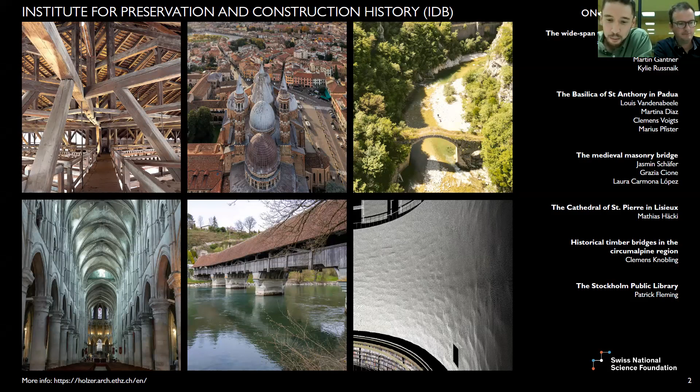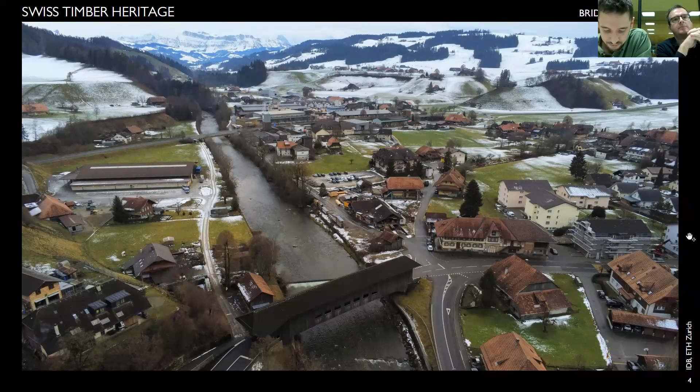We will focus on the incredible Swiss timber heritage, which was not damaged by the wars of the 20th century, making Switzerland a unique location to look at old bridges and roofs. In particular, we would like to draw your attention to this technological feat, which consists of making curved elements out of straight timbers. We find such laminated arches all over Switzerland in bridges and roofs.

So Clemens will now start with the bridges, and I will continue with the roofs. Thank you, Louis.

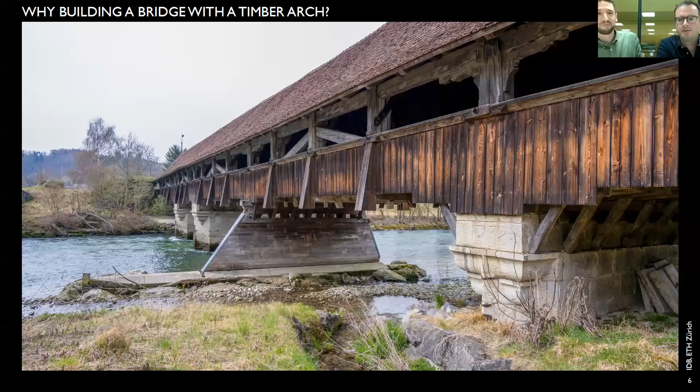So you expect me to say something about timber arch bridges, and I'm showing you this bridge here with a simple trestle in the middle. Don't worry, I will not start from zero, but this picture helps me to speak about the actual construction task: why would you build a bridge with a wooden arch? Doesn't that sound a bit absurd to make an arch out of wood, a material that is essentially linear, especially before Otto Hetzer invented the laminated beam?

We will hear more of that later. One reason is the danger of floods and ice. You can imagine this here: the more the piers are in contact with the water, the more the bridge needs to be maintained, and the greater the risk of collapse due to floating debris and ice, for example. The piers of the bridge shown here have had to be rebuilt several times since the 16th century. An arch would be a structure to span the whole river without any intermediate support.

Another reason might be the complexity of timber joints. The greater the span, the more complex the structure, and the more timber joints need to be designed and incorporated into the structure.

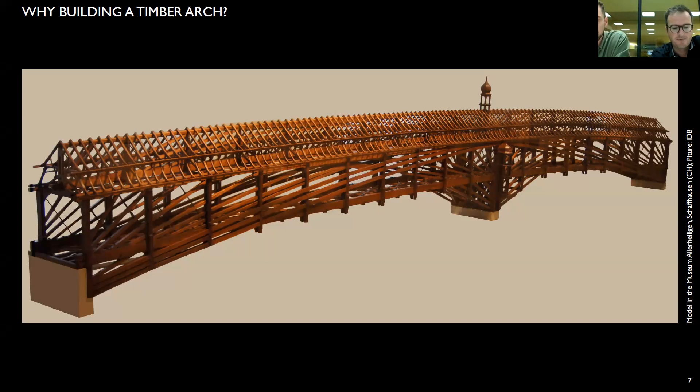Less than 10 years later, the same master builder built a bridge in the nearby town of Wettingen that had the same free span as one of the openings in Schaffhausen, around 60 meters. But it was constructed in a fundamentally different way. Instead of a complex multi-layered structure, the main element is now a solid, true arch to which the king posts supporting the roadway are attached.

Here is our rigid arch, the king posts, which are carrying the roadway of the bridge. And please also keep in mind that the arch of these kinds of bridges is always on top of the roadway, sometimes leading directly to the abutments, and sometimes working as a kind of bowstring structure when the arch is fixed to the tie beam.

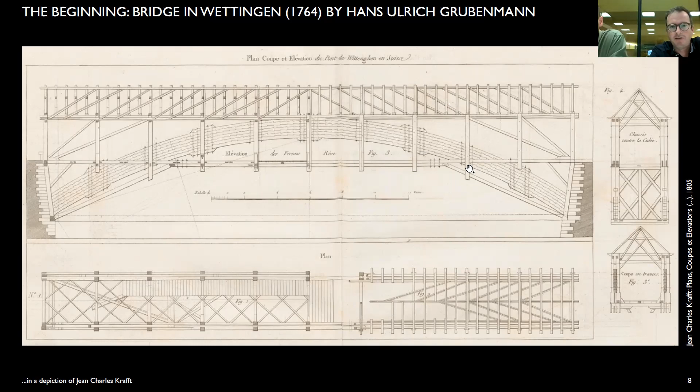Keep that in mind. In this drawing by John Soane, he shows these bolts fixed in a radial way, which is maybe more likely. But on the other hand, he, or the engraver, did not care so much about the interlocking of these arches — you see here these toothed structures.

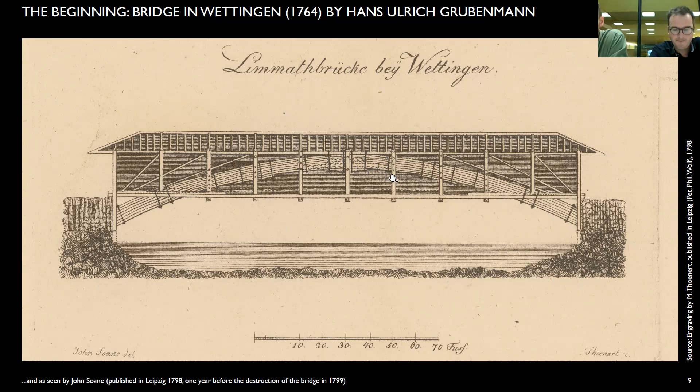There is a third source for this bridge, a model designed by the builder Grubenmann himself. It shows another picture. If you look at the elaborate wind bracing and the complex roof, you might assume this is also not representing the real bridge. Indeed, it was a model built to present the idea of an arch bridge to the abbot of the Wettingen monastery, who was the one who paid for it in the end.

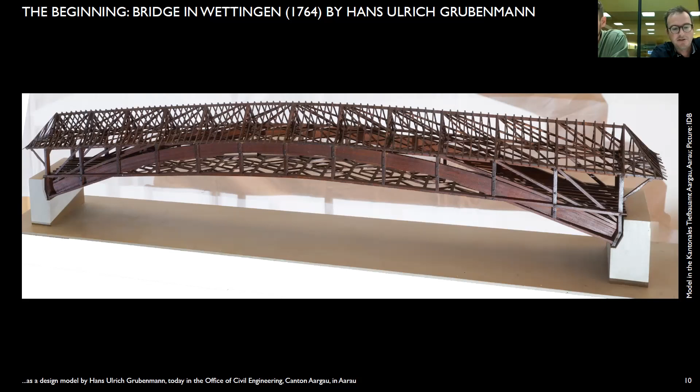But what is for sure is that the development begins here and already reaches a significant peak. And if I say it was beginning here in Switzerland, that's not completely true — the idea of building arch structures in wood is quite old.

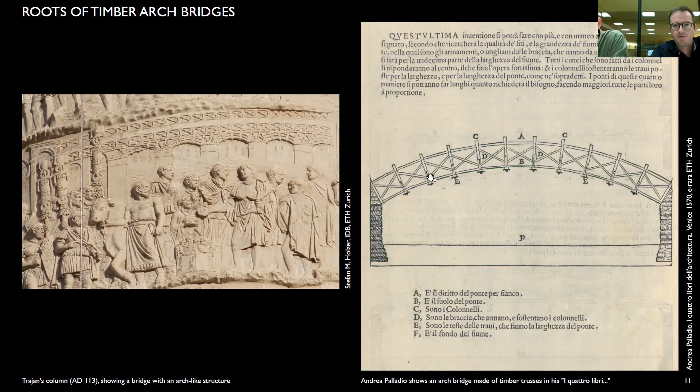In the 16th century, here on the right side, you see a depiction by Palladio. He shows another popular idea, a trussed arch, imitating the principle of a stone bridge by assembling trusses like wedge-shaped stones.

Also, the idea of the massive arch, which is the subject of the following slides, is older but never really matured at the time. This drawing by Fausto Veranzio from 1595 must therefore be regarded as a curiosity.

But what he does take into account is that the two layers of the arch should be joined together in a shear-resistant manner, even if this type of production, like a jigsaw puzzle piece, would entail a high consumption of wood.

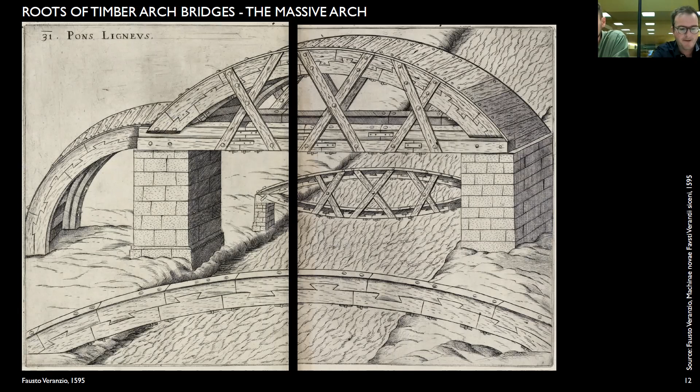We also don't want to ignore that the idea of the wooden arch had its first breakthrough in the 16th century, for example with Philibert de l'Orme. Here you see his invention on the left side, in the depiction from himself, or here from Krafft, 1805.

But as I said, we are confining ourselves to the massive arch made of bent beams, not of sawn boards.

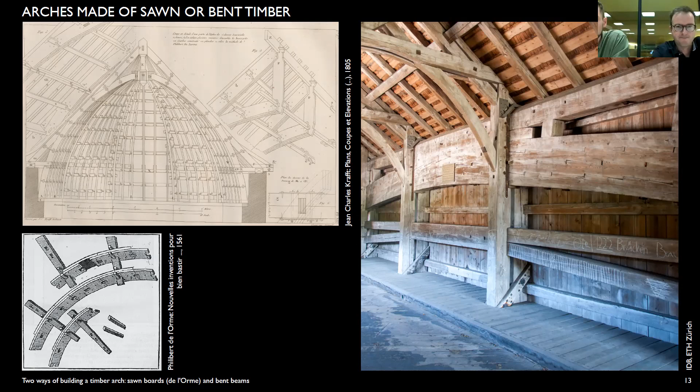This map shows the locations of the remaining historic timber bridges with real wooden arches. You can see they were all built in the 19th century. There used to be twice as many, but most of the 18th century bridges have not survived — some were torn down, others were sacrificed to car traffic. Nevertheless, there are still 8 of them in place, with a remarkable cluster in the Emmental Valley, in the center of Switzerland.

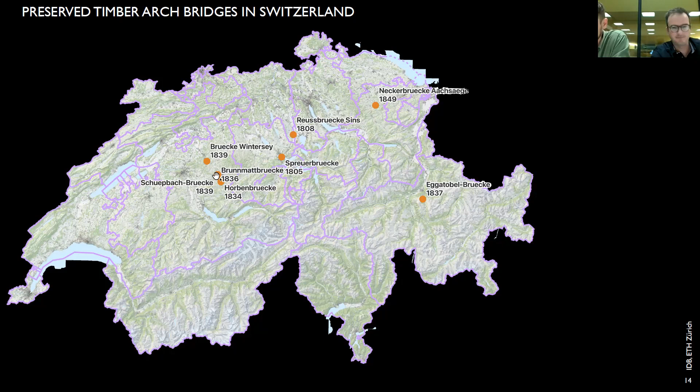The surviving bridges show two different types of timber arches: those with interlocking layers, as you see here on the left side, and those with non-interlocking layers, as you see here on the right side. The lamella of the interlocking arches show a saw-like structure, each interlocking on both the top and the bottom with the next lamella.

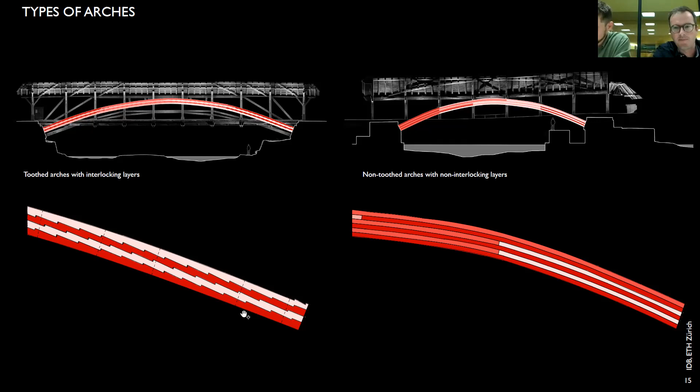In the case of interlocking arches, the oldest is the well-known bridge of Wettingen, already introduced. The oldest one with a non-interlocking arch was the bridge of Mellingen, also already destroyed. Mellingen was built 30 years later than Wettingen, in 1794, by the master builder Ritter from Luzern. We could call him the doyen of the non-interlocking arches. We didn't find an older example than this one by Joseph Ritter.

Interesting is that the seemingly complex interlocking arch is older than the non-interlocking arch. In fact, it turns out that the latter may have been a simplification, but it does not have the durability and monolithic effect of the interlocking arch. We will see this with another example on the next slides.

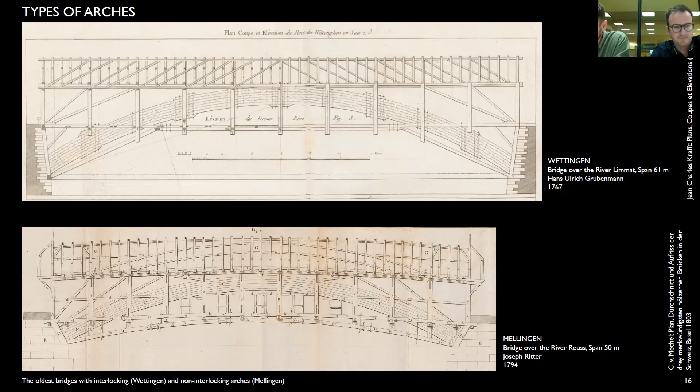But first, we want to lift ourselves up to take a broader view of the global context. We see that the oldest bridges we can still trace are in Switzerland - here, Wettingen, already shown, and also Mellingen, still from the 18th century. The reasons for this were explained by Louis at the beginning. By the way, the red ones here are the ones still existing.

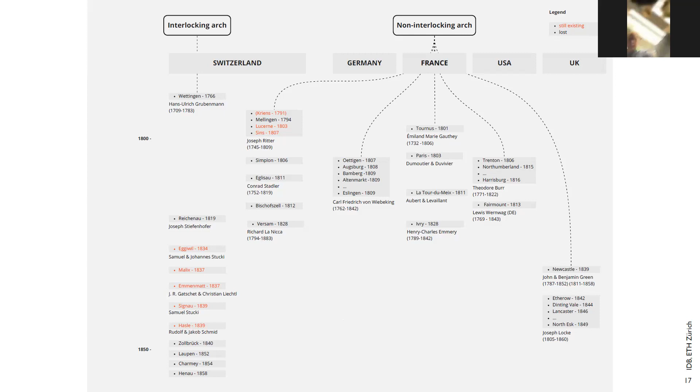You can see that it also starts in France, in Germany, and also in the US at the beginning of the 19th century. A famous builder in this context, for example, is Carl Friedrich Wiebeking from Bavaria. Obviously, they all built the arches below the roadway of the bridges, whereas in the Swiss examples, with one exception, the arches are always above the roadway, supporting it with the help of king posts.

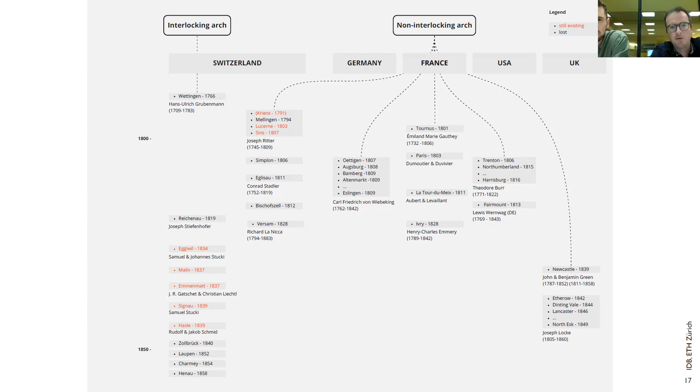Let's have a look at some contemporary examples from outside Switzerland. Here you can see the famous Pont de la Cité in Paris from 1803. This was later destroyed and rebuilt in more or less the same way. What you can see here is a non-interlocking arch composed of 4 layers of bent beams below the roadway. As you can imagine, this is a disadvantage for the durability of this bridge, because the arch is not really protected from the rain. Yes, there is cladding on the sides, but the water can still drop from above onto the arch and keep it wet, so to say.

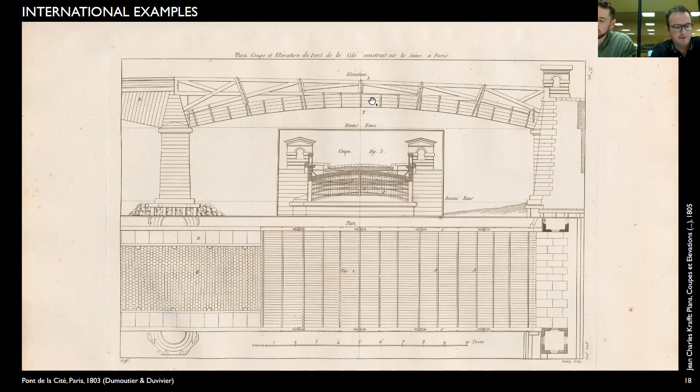Another famous example, in this case from the US, is the Colossus Bridge near Philadelphia, which had a span of an incredible 340 feet. Also here, the Colossus Bridge shows the arch open - it is not really protected. It is below the roadway, which makes it difficult to maintain this kind of bridge.

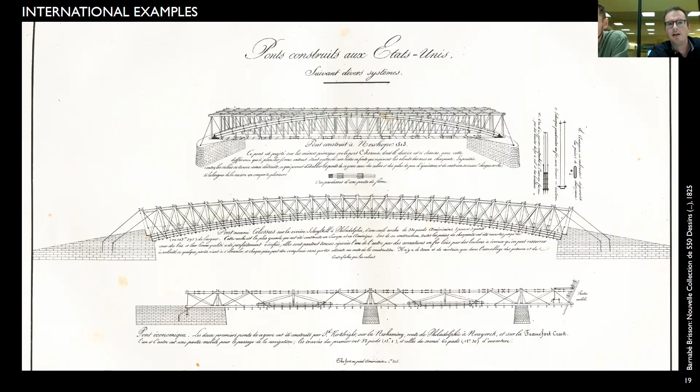But we want to limit ourselves to the Swiss examples today. So let's get back and have a look at this overview. You see here the preserved arches of the Swiss timber arch bridges in these drawings, all shown in the same scale. You can see the difference from these very tiny bridges, like the one here in Grisons, Graubünden, the very east of Switzerland, to the biggest one in the Emmental region with a span of 60 meters - so from 20 to 60 meters.

2 bridges have a non-interlocking arch; the rest have interlocking arches. Next to these arches you see, if you can see it, the members of each arch - we have shown them here separately. You can see a big variety in size and also in the degree of curvature these members have. The process of bending will be explained in some slides later. Another aspect which might be interesting: we have just one bowstring arch which is attached to the tie beam, not shown here. All the others go directly from one side to the other, directly to the abutment.

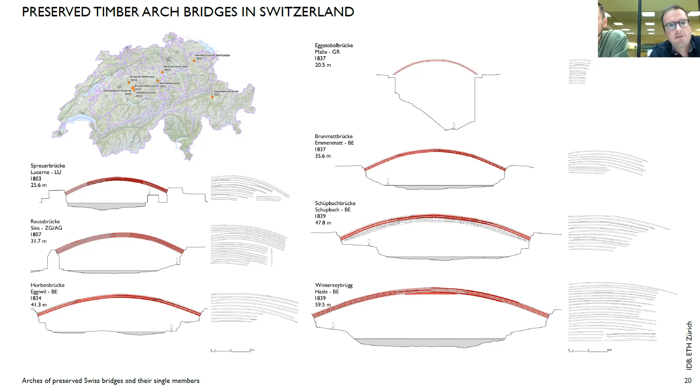I will now show these bridges in a few pictures. First, the non-interlocking arches. A famous example, again built by Joseph Ritter, the master of the non-interlocking arches, is the Spreuerbrücke in Luzern, a touristic hotspot. It has a span of 25.6 meters and is composed of this non-interlocking arch, made up of these members which are shown in different red colors here.

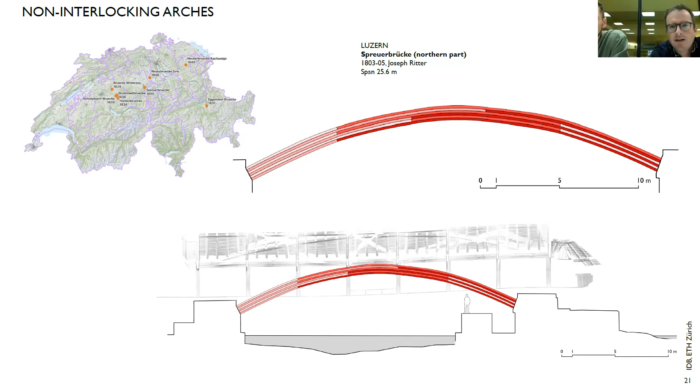This is no problem here in this case. It's just a small bridge with a span of 25 meters, and there is no heavy traffic on this bridge, just open for walking. So this might not have become a big problem here.

It's a bit different in the next example, also a non-interlocking arch by Joseph Ritter with a bigger span of 31.7 meters, also above the river Reuss in the town called Sins. You can see it here. Just one part of the bridge has a real arch.

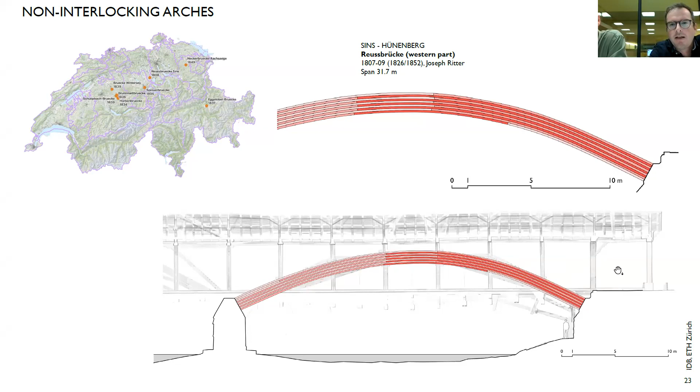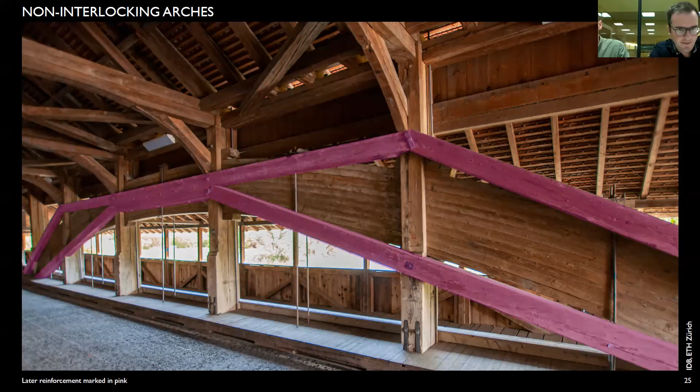And if you see the structure here, it's a multi-layer arch, non-interlocking, but you can see it is reinforced by an additional truss, because also this arch was not really working anymore, especially because of the heavy traffic on this bridge. Also before the cars came, this bridge was used for heavy loads, and this not very rigid, not very stiff arch was not enough here.

Now, as I said, we just have two bridges with non-interlocking arches. I come now to the interlocking arches.

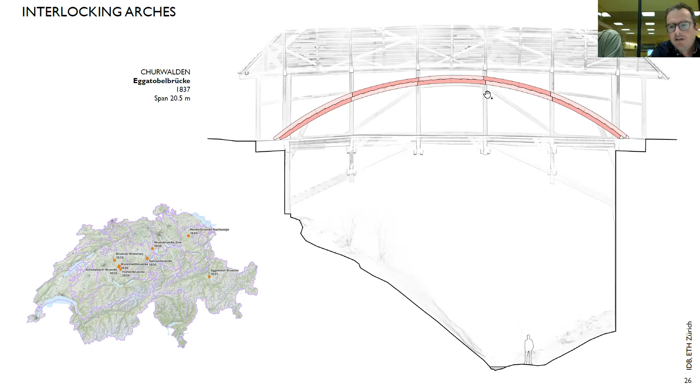Our single bowstring construction here in Graubünden, with a span of just 20 meters. You see here very short members of this arch. It's also just two layers, and all these members have a butt joint directly in the middle of the king post, but it is still a continuous arch. You also have arched beams which end left and right of the king post. Then we wouldn't call this a true arch bridge, but here it is really a continuous interlocking arch.

A very tiny bridge, but very beautiful with this nice landscape around it. But then they become really big.

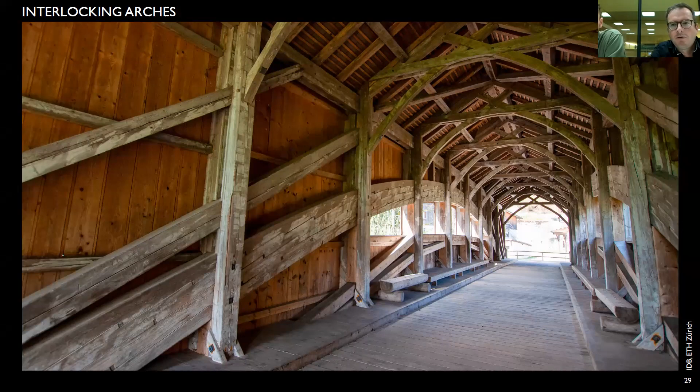Next example is the Brunnwartbrücke, heavily restored and also translocated, built in 1837 and translocated in '91, with a span of 35.6 meters. You see here the 4-layer interlocking arch, and more or less the same structure you can see in

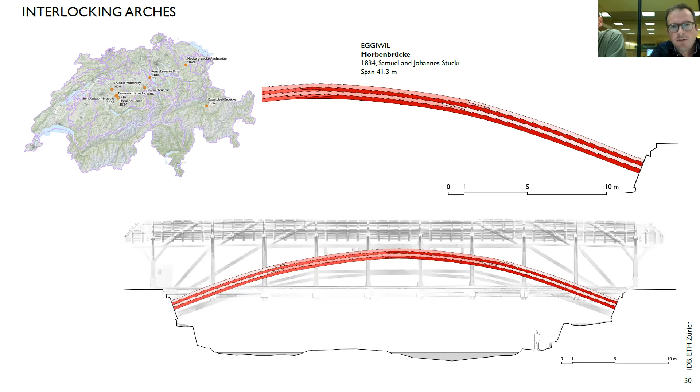a longer break in building arch bridges. We are now in the year 1834, and the bridges I showed before were around 1800. Maybe there were some more arch bridges in the meantime in this region, but there was a big flood in the 1830s.

I don't know exactly when, but this big flood swept away all the existing bridges at this Emme River, and only this one here survived. This was already standing when this big flood came, and maybe this was then the role model for other arch bridges in this Emmental region.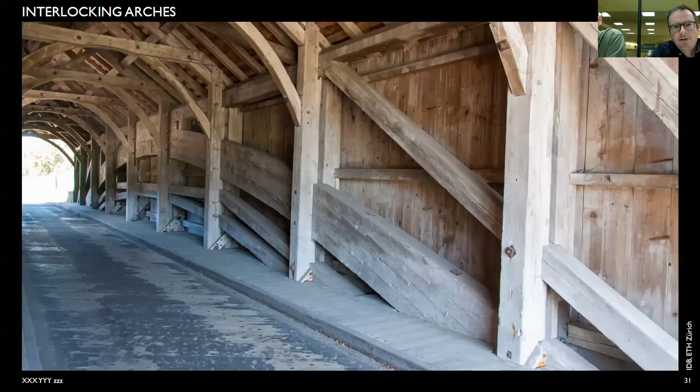Like, for example, here you can see it in a photo, the 4-layer arch. This is really one of the most beautiful examples of an arch bridge. And this here was then also built, maybe the bridge shown before was the role model for these following bridges

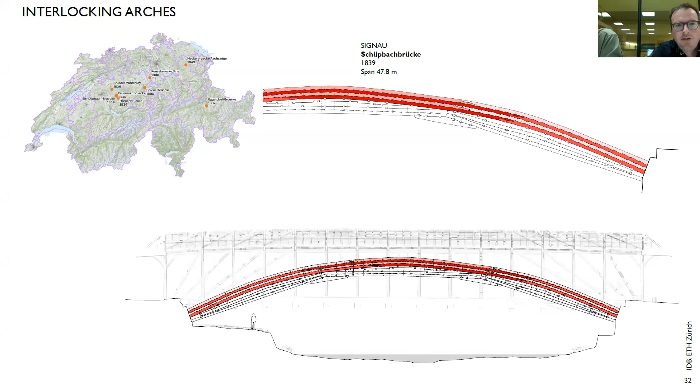then in the Emmental region, which survived this big flood because of this one rigid structure, which is not touching the river. And this is the Schüpbachbrücke in Signau from 1839 with a span of nearly 50 meters, which is still carrying lorries with a weight of up to 28 tons.

Yeah, but you see here this arch was heavily reinforced. I marked the original arch, and all structures you can see below are the reinforcements.

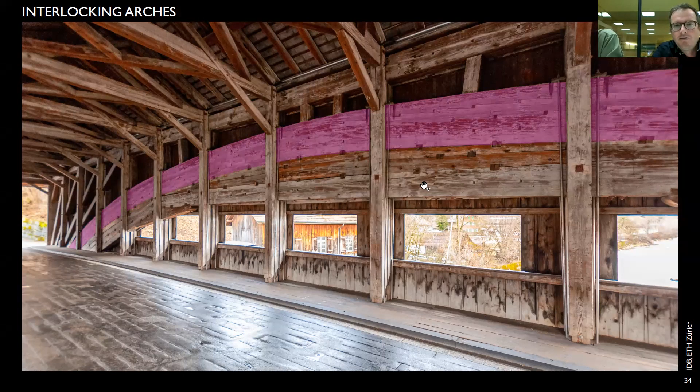And finally, the biggest one in the Emmental region, again, the Winterseybrücke in a town called Hasle, also from 1839. The span is 59.5 meters.

And this is really impressive. You see here a 7-layer arch, and also the structure here below are arched. You can see additional arches in the roof. So the arch is really the successful structure then in the Emmental.

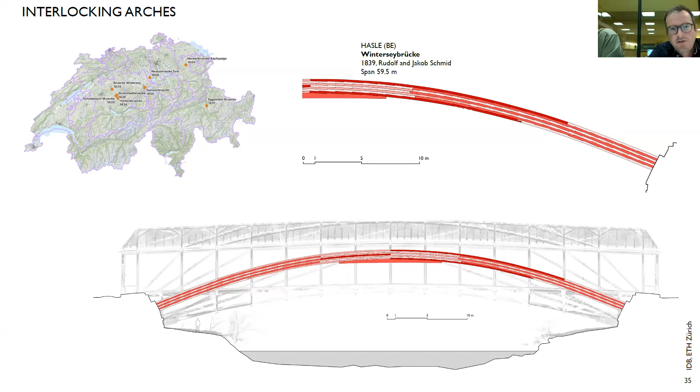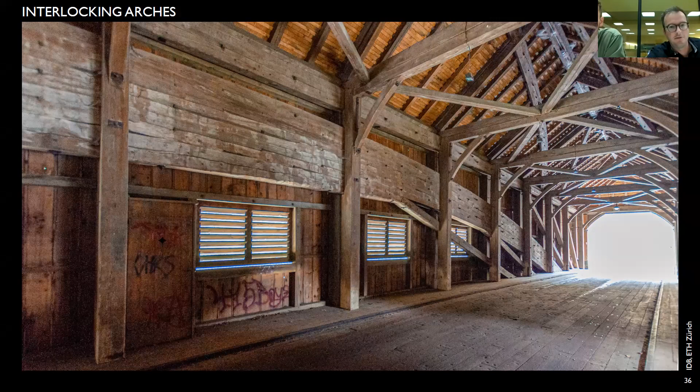There was another bridge called Zollbrücke, which had the same span, but unfortunately also this bridge burned down. And this now is the biggest surviving historic timber bridge in Europe.

So now you have seen all the existing bridges. Now let us think about how these bridges were designed. This was the case for all bridges.

First, the builders, the master builders, had to build scale models. Here you see a nice example of a working model. If you look on the left side and compare it to the right side, you see different structures. You can really see how the master builder was thinking about the structure he really wants to implement using this model.

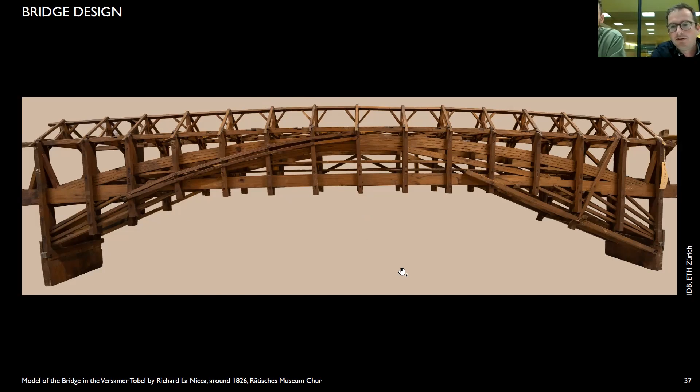By the way, this model shows a bridge which is not existing anymore, also in the canton of Graubünden, Grisons, a bridge in the so-called Versamer Tobel by a famous bridge builder called Richard La Nicca. Unfortunately, all his bridges disappeared. This is from 1826. This model is still preserved in the museum in Chur.

And they used models for the design process. They also had to build models to present it to the council who paid for the bridge in the end, to convince them of this structure.

This is a nice example of another arch bridge model, the bridge of Bischofszell. Also, this bridge is not existing anymore. And there you see that also these models can be very useful and important last witnesses of such incredible structures.

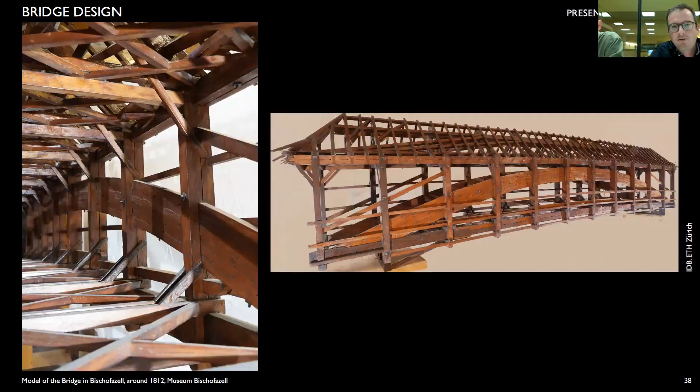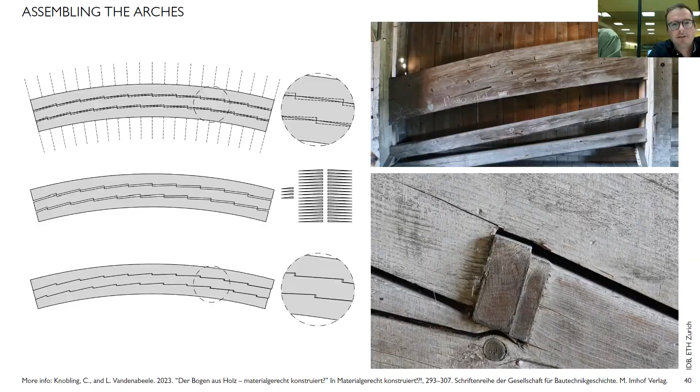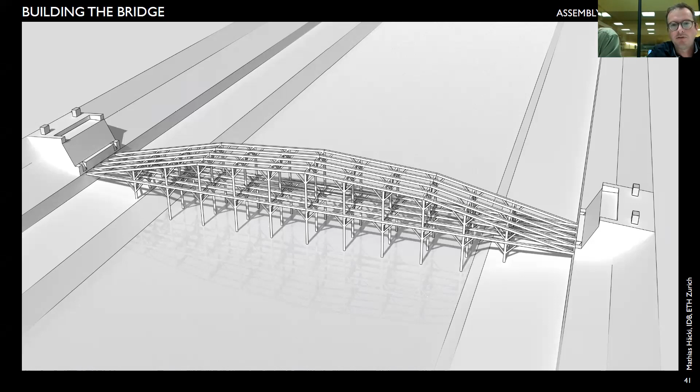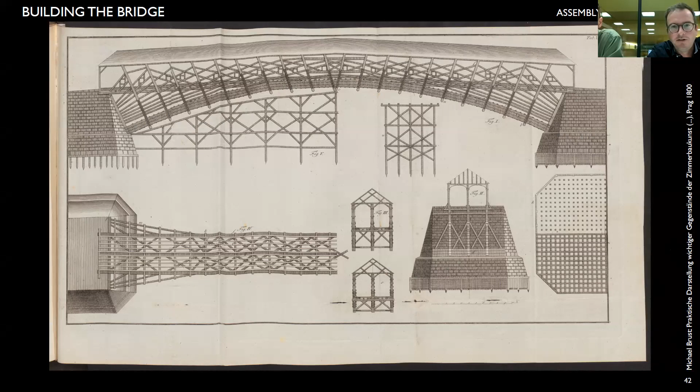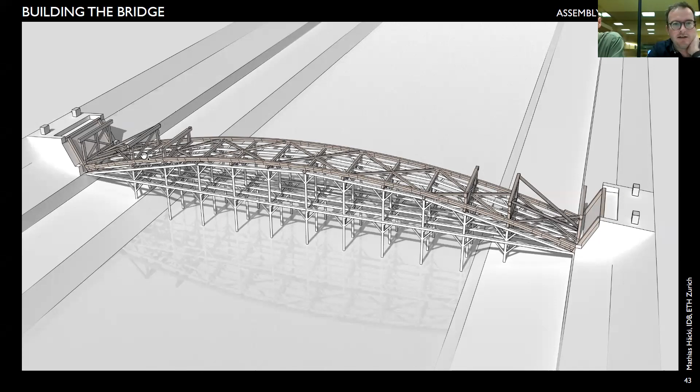On this scaffolding, then the lower parts of the bridge could already be assembled. By the way, this 3D model shows the biggest of all arch bridges, this Wynigen bridge, the last one I showed, which is still existing.

In the next step, you could erect these king posts. The king posts are always composed of two identical parts, one on the outside, one on the inside, and this tie beam in the middle, and also the arch in the middle of these two parts of the king post. And here those king posts, already erected, could be used also as a kind of falsework.

for the timber arch. As I said, the beams were already bent, but they always bent back a bit. But using this king post as a falsework and then putting the members of each arch into these open timber joints made them stay in place, and then they were really fixed and could build this rigid arch structure. Here the one colored in red is not yet fixed between or in this open timber joint, but the others already are.

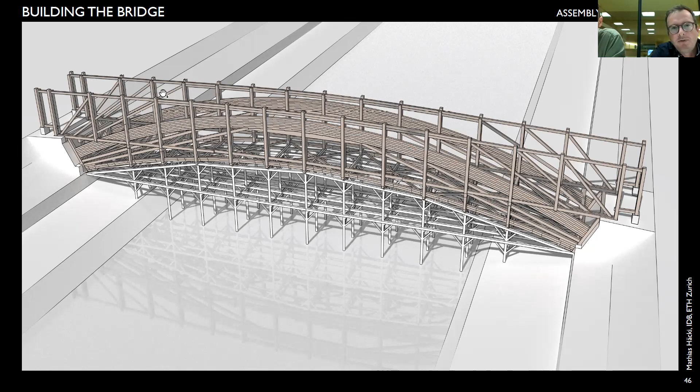And so this works from one layer to the next until the arch is ready. Then the inner parts of the king post could be attached, and then also the beams which in the end carried the roof, the cross bracing, and finally the roof. Also here they used these quite thin arches to carry the load of the roof to the sides, if this really works or not. And in the end, our scaffolding could be removed and the bridge was completed.

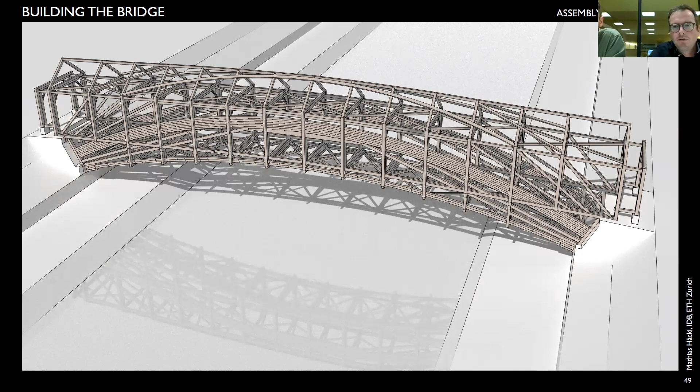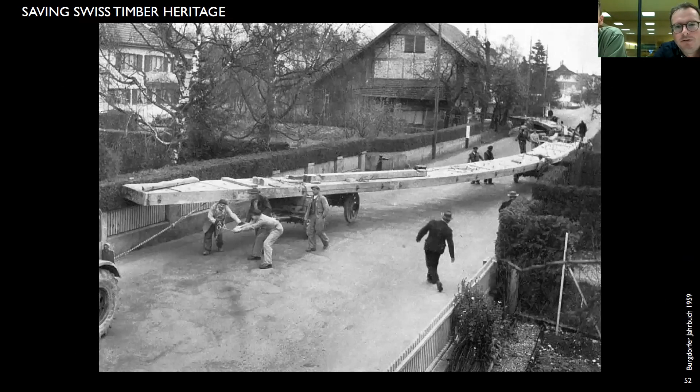And the dismantled parts of this bridge then were removed and brought to another place where they were assembled again. And that's why this bridge is now standing some 100 meters further down the river at another place.

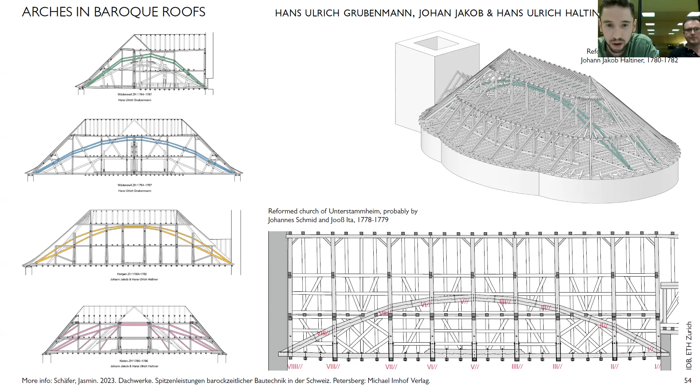If you're interested in this topic, there is a recent book by our colleague Jasmin Schäfer, which was printed just last week, so you can find this online. The reference is at the bottom of the slide.

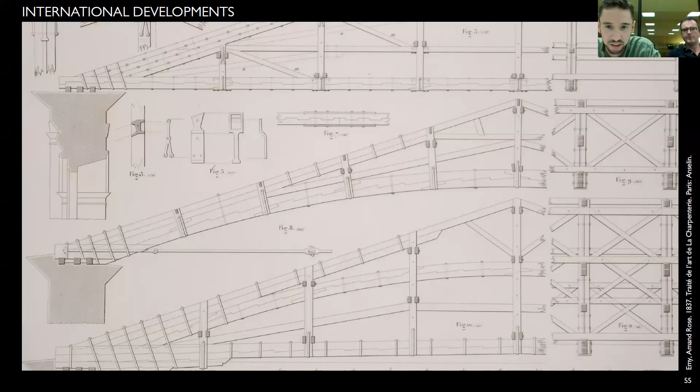But the idea to build interlocking arches in roofs was clearly in the air at the turn of the 19th century. We find such roofs in many treatises, for example, here in the treatise of Emy.

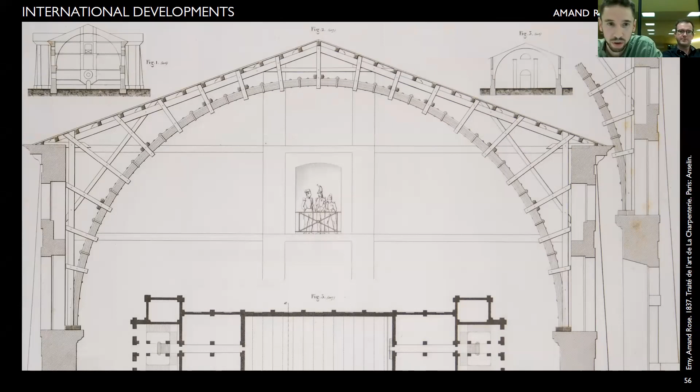And Emy is responsible for the next milestone in this development. He invented and built several laminated roofs in France and in Belgium. These roofs consist of bent boards, which are assembled with iron bolts and iron straps. Emy was a military engineer, so most of these roofs are in riding halls, military riding halls.

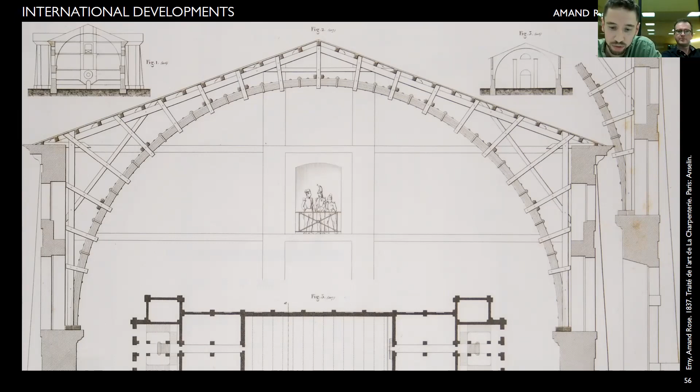This is a side note, but quite surprisingly, two of these roofs are still standing today, and they're about 200 years old. You can find one in Bayonne in France and another one in Liège in Belgium. This is really worth a visit.

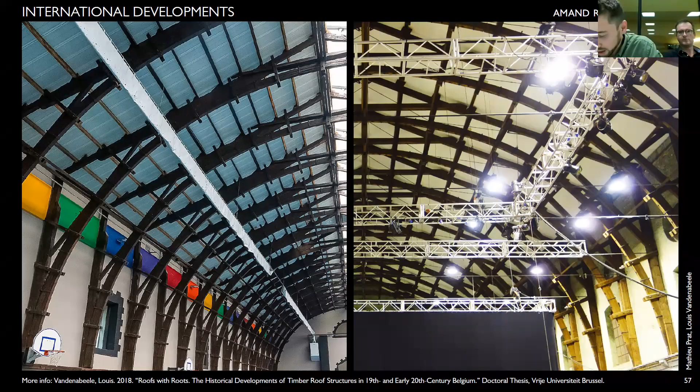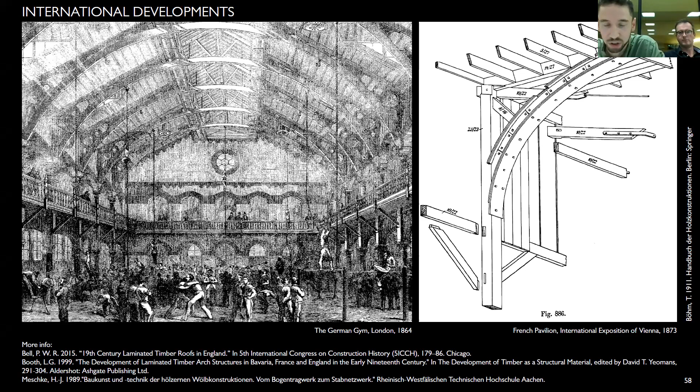After Emy, in the second half of the 19th century, this development continued, especially in England and in Germany. This could be an entire lecture, so we will not go into that. We will stick to our Swiss roofs, where a lot of very impressive roofs were built in the second half of the 19th century. This is actually the topic of a PhD dissertation by our colleague Hoshanak Haddadi. So a lot of wide spans in timber in the second half of the 19th century in Switzerland, but not so much laminated roofs. We have just a few examples.

And we actually have to wait until 1906 and the patent of Otto Hetzer, carpenter and sawmill owner in Weimar, Germany, who patented this glued laminated timber. Of course, he was not the first one to use glue to attach boards together, but he's really the one who managed to advertise this as an engineered material and as a cheap alternative to iron structures. And this worked very well.

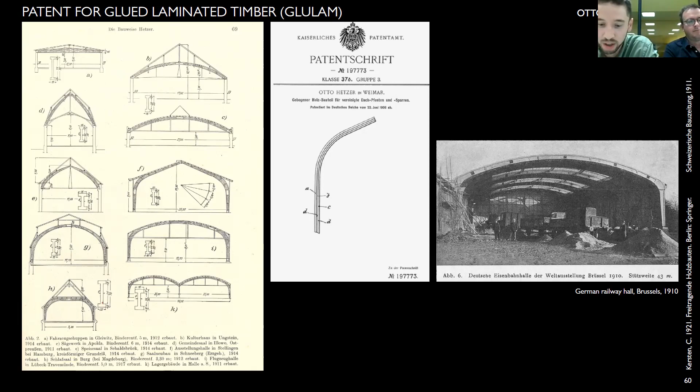Very quickly, he built a lot of structures in Germany, but also abroad, especially in Switzerland, where as early as 1908, only two years after, the engineering office of Terner and Chopard, based in Zürich, bought the patent of Hetzer. And in 1912, they formed a corporation of contractors who were producing and using the Hetzer system all over Switzerland.

Again, this story can be discovered in details in the PhD of Hoshanak Haddadi, which is available online on the research collection of ETH.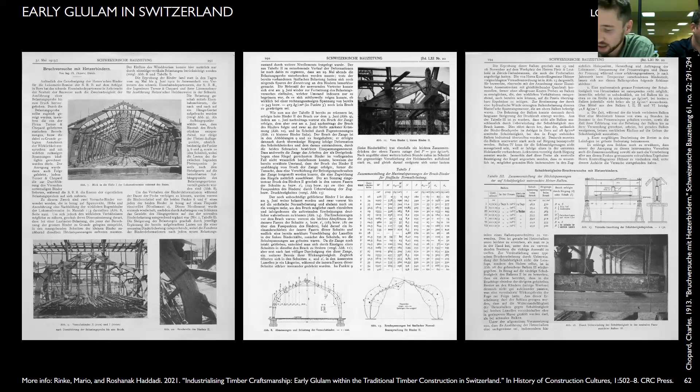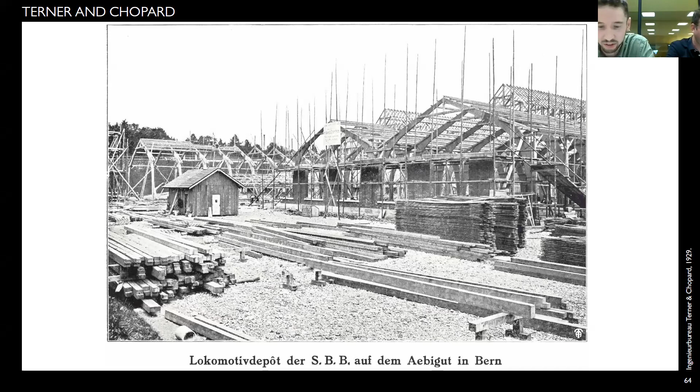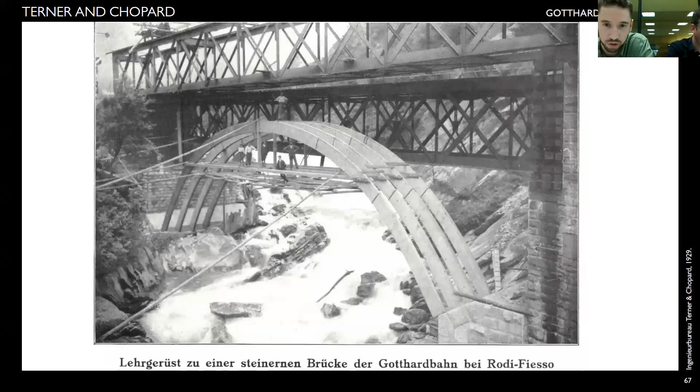The first glulam roof in Switzerland was built already in 1910 in a military riding hall in St. Moritz by Terner and Chopard. In the following decades, they built all kinds of structures: this storage building for the SBB, but also factories, gyms, temporary structures like centering for bridges, and a temporary shelter for planes at airports, and so on.

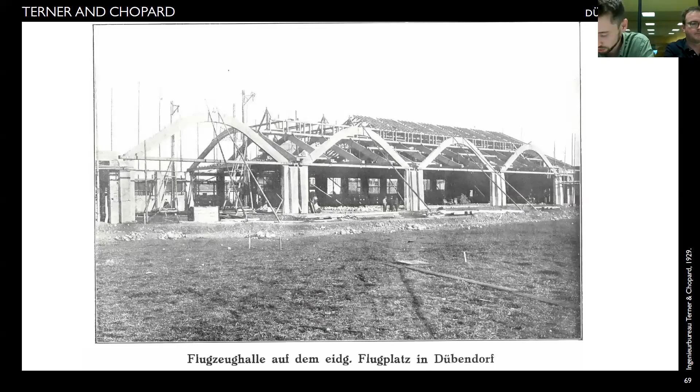Glulam was so popular in Switzerland that hundreds of structures were built in the 1910s and 20s. Today there is no inventory of these glulam structures, and we still discover them from time to time by chance. The good news is that, like the bridges, many of these roofs are still in place.

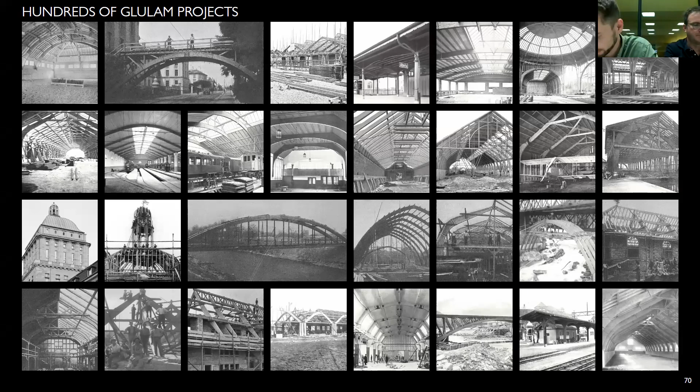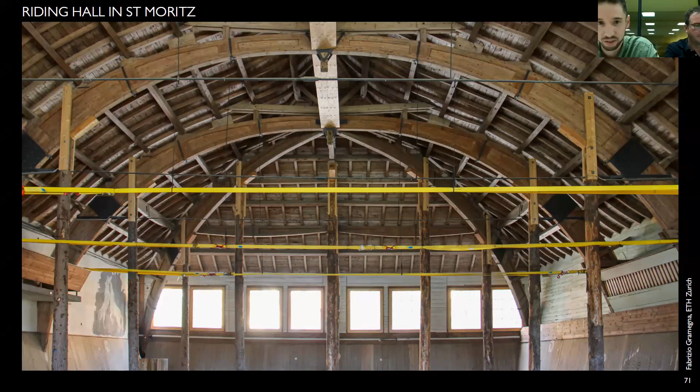To end our journey, I would like to show you a few examples that we have visited and surveyed, or that have been surveyed by our students. The first one is the oldest, the first glulam roof built in Switzerland: this riding hall in St. Moritz. As you can see, it's still in quite good shape, though it has been reinforced over the years.

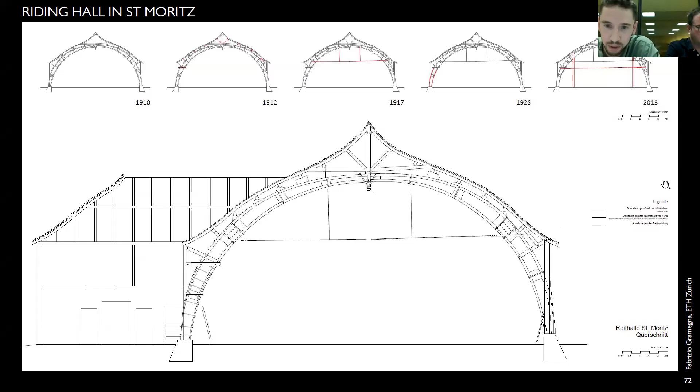You can see here the arches, composed of four segments assembled at the top with the king post, with some iron struts, and here, at this level, with some iron plates and bolts. Here are some details of these iron plates. What's also remarkable is that all the rafters are in glulam because they are curved, as you can see here. So all these elements are also in glulam, and some of the purlins also consist of glulam elements—a very nice and very early example of glulam structure.

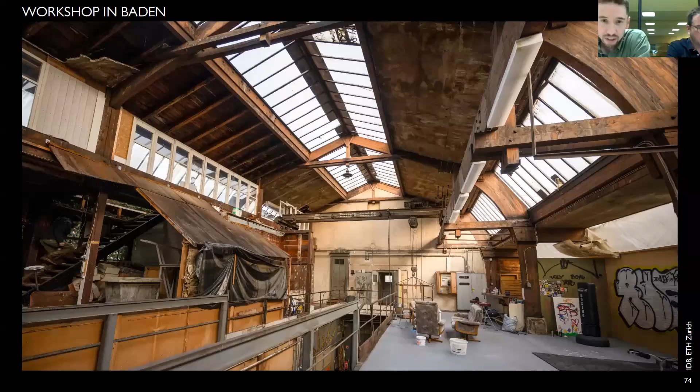The second example is ten years younger, built in 1920. We found this by surprise a few months ago, by chance, in an old staircase factory in Baden. You can see that they really trusted the glulam structure, because the arches support a crane that can carry 5 tons, and this crane rolls on glulam beams.

This is how it looks. An interesting detail is that this glulam structure, unlike many others, was built on an existing building which doesn't have a rectangular floor plan, so the span is continuously changing. To cope with that, they had to cut the prefabricated arches at the top, and because of this, the ridge of the roof is not horizontal but slopes down.

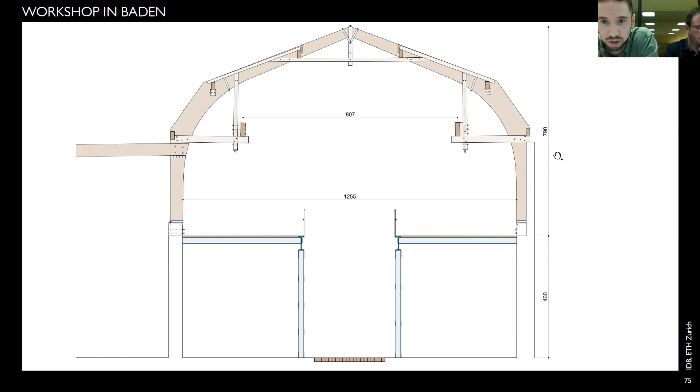You can also see some carpenter's marks, typical of all these glulam structures—they are still full of carpenter's marks. Here are some details: the typical assembly at the top with a king post and some iron straps, with most connections done using iron bolts. Here you can see a nice carpenter's mark. Again, in this roof, all the purlins are in glulam.

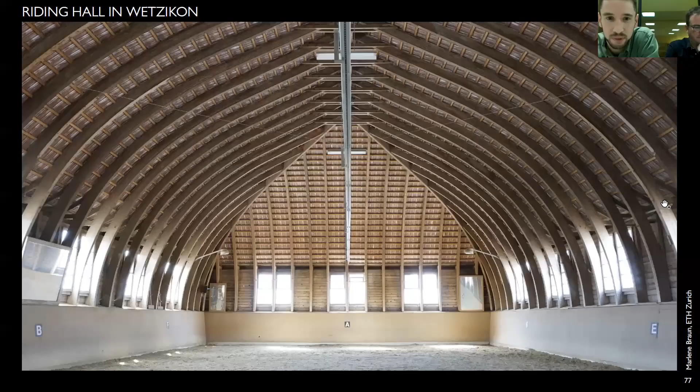We move to our last example, this riding hall in Wetzikon from 1927, probably the most elegant example because this is not a purlin roof—you have only these glulam elements, which are very slender and assembled at the top with a tiny king post and a little collar. A very simple and elegant structure in Wetzikon.

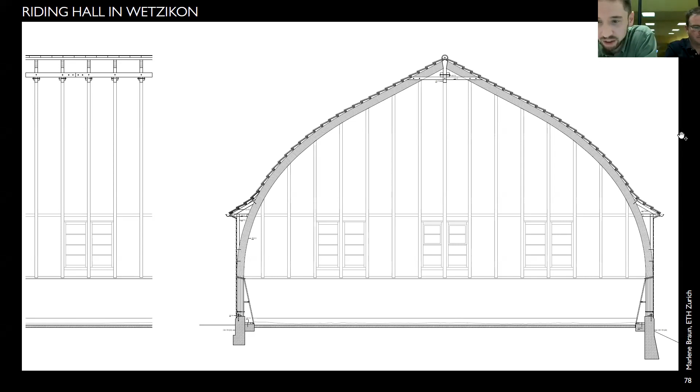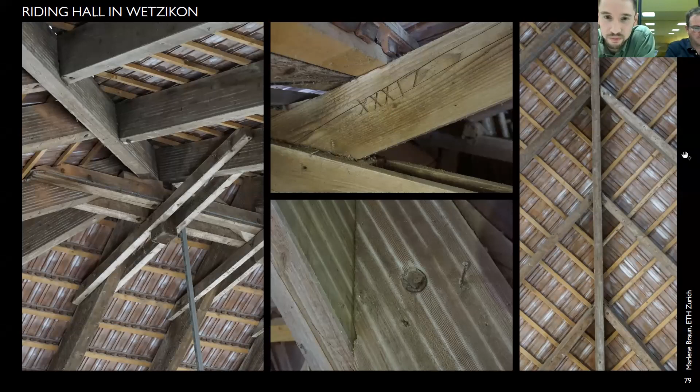Some more details: the assembly at the top, the carpenter's marks—it's really a very nice mix of craftsmanship and timber engineering. I hope you enjoyed this journey from bridges to roofs in Switzerland. And Clemens, I give you the final word.